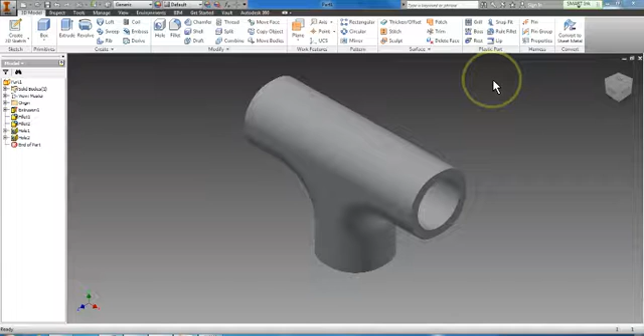Alright, this is the part that we're going to 3D model. This is the T fitting for your ladder golf game. To start, I'm going to go up to New, and I'm going to create an English template, standard inch part. Click Create. Take me to this window.

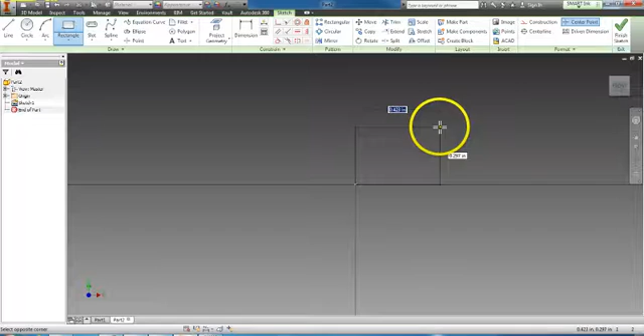And just like the other parts we've drawn, I'll go to the upper left corner, click Create 2D Sketch. Select one of the drawing planes in the back. And I'm going to start with a rectangle. Just a 2-point rectangle. I'll go from the middle. I'm just going to drag out to a distance. Now I'm going to use my line tool, and I'm going to kind of cut or draw a box, a little square in each corner. And distance doesn't really matter right now, we're just drawing lines.

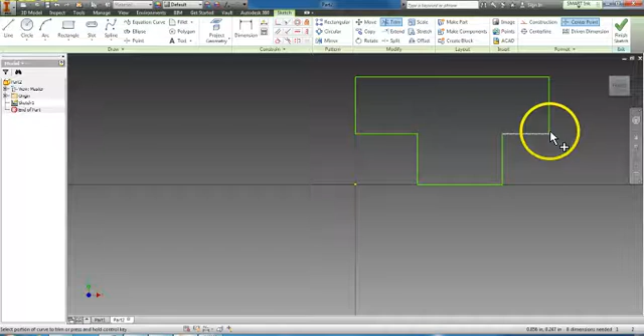Go up here, I'm going to use the trim tool. Alright, and I'm going to click on the bottom half of this line. It'll delete that, as well as this part of the line, this part, and then this part too. So I've got kind of a boxed out T looking object. Now I'm going to go up to the dimension button, and I'm going to dimension this thing. I'm going to click on this line, click once, go up, click again, and I'm going to change that dimension to 3 inches. Click the green check mark.

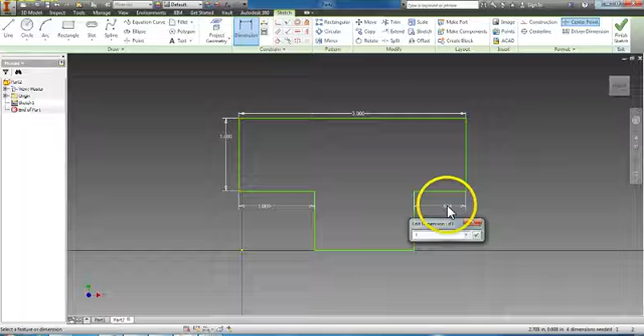And then I'm going to change this dimension. I'm going to click on this line once, go over, click again, change that to a 1. I'm going to change this dimension, this line, to a 1. I'll make this a 1, as well as this line right here, a 1. So now I should have, I'll check this one, that one's good. I'm going to get an error there, that's fine. Alright, now I've got this boxed out T looking shape. I'm going to click on Finish Sketch in the upper right corner, take me to 3D World.

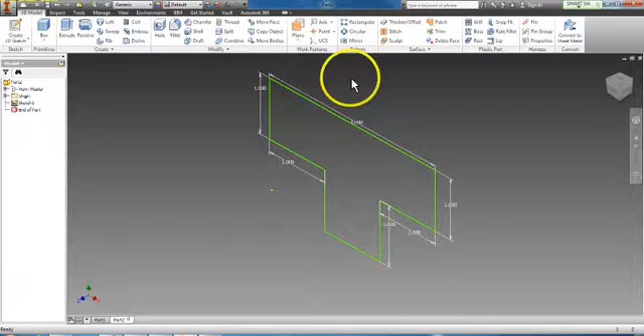And from here now I need to go to Extrude. So I'm going to click on Extrude. I'm going to extrude it to 1 inch. Click OK. And now I've got this boxed out T looking shape. Now, the tool we're going to use up here is called Fillet. The Fillet tool is going to round our edges. So I'm going to click Fillet. I'm going to change the radius up here in my dialog box to a 0.48.

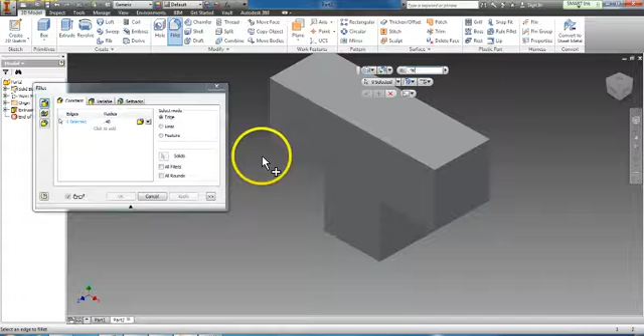Now I'm going to select the edges I'd like to fillet. There's a bunch, so watch carefully. I'm going to start with this edge, and actually why don't I look right at the front. I'm going to do that one on top. I'm going to do this one, this one, this one, and this one. I'm going to click the green check mark, or OK.

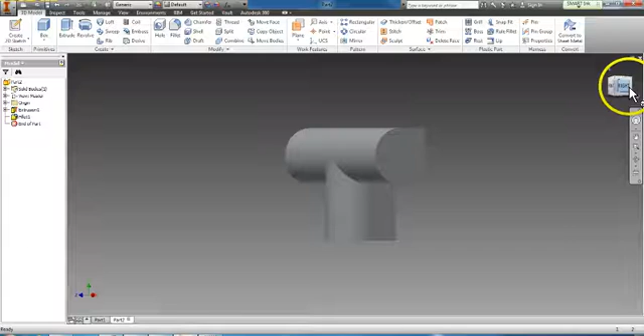I'm going to rotate this now, so I'm going to go up to my view cube, I'm going to click on this arrow, rotate to the side, and I'm going to rotate one more time so I get to the back. I'm going to go back to the fillet tool, I'm going to fillet the top edge, ones that are parallel and underneath of it, as well as these vertical edges, green check mark. And then I'm going to go to the isometric view, and actually I'm going to rotate around just a little bit more.

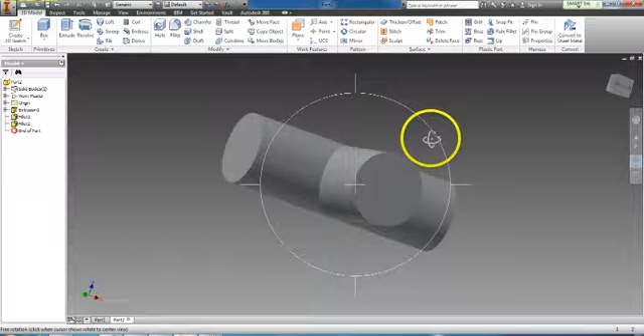I'm going to click the fillet tool again. I want to fillet this edge as well as this edge. Click apply. And if we look at it now from the isometric view, we've got our rounded T fitting for our game. Now we've got to create 2D sketch. I'll click on create 2D sketch. I'm going to click on the circular end over here. I'm going to use the point tool.

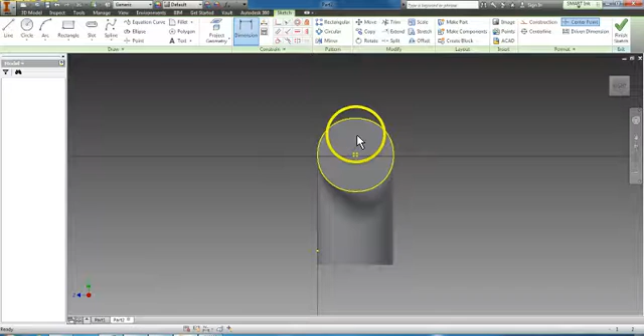Now if you look very carefully, you can see these little black marching ants. I'm going to zoom in. See those little black dotted lines? I call them marching ants. Those indicate that I'm in the exact center of the object. So I'm going to click once there with my point tool. So now I have a point in the exact middle. I'll go up to Finish Sketch to take me back to 3D World. So now my ribbon has changed functions.

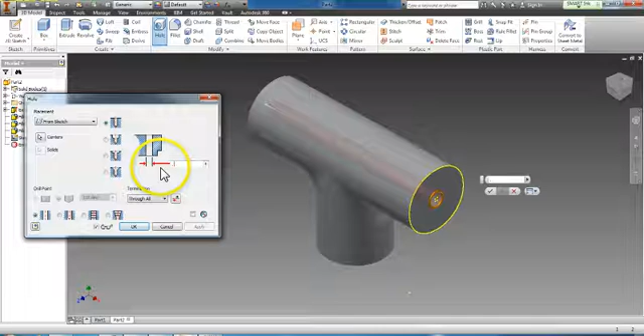I'll click on the Hole tool, and it's going to automatically select that center point. If it doesn't, just click on the point. Your termination down here, this menu should say Through All. And then the diameter of this box right here, we're going to change that to be a 0.75. Click OK. And now, if you rotate it around a little bit, you should be able to see that there's a hole going all the way through.

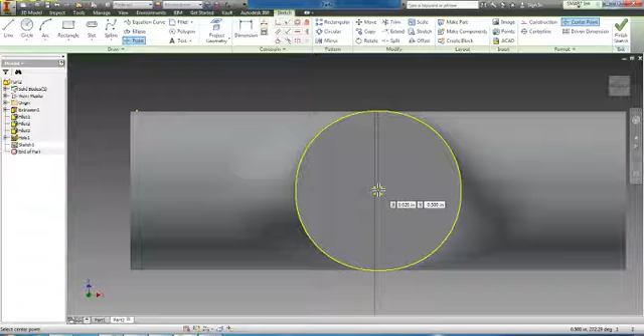Now, I'm going to go back to Create 2D Sketch. I'm going to click on the bottom of my T fitting. I need to make another hole. So I'm going to go back to use the point tool. I'm going to find those little marching ants right in the middle, put a point there, click Finish Sketch, take me back to 3D World, go to my Hole tool, and now instead of the termination being through all, I'm going to go distance, and the distance of that hole needs to be a 1.5 inch deep hole.

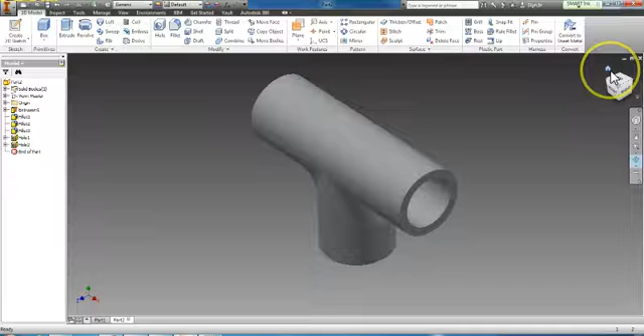Click OK, and now your T-fitting is complete. If you rotate around, or go to the isometric view, you should be able to see we have a hole that runs halfway through into the other one, and a hole that runs all the way through.